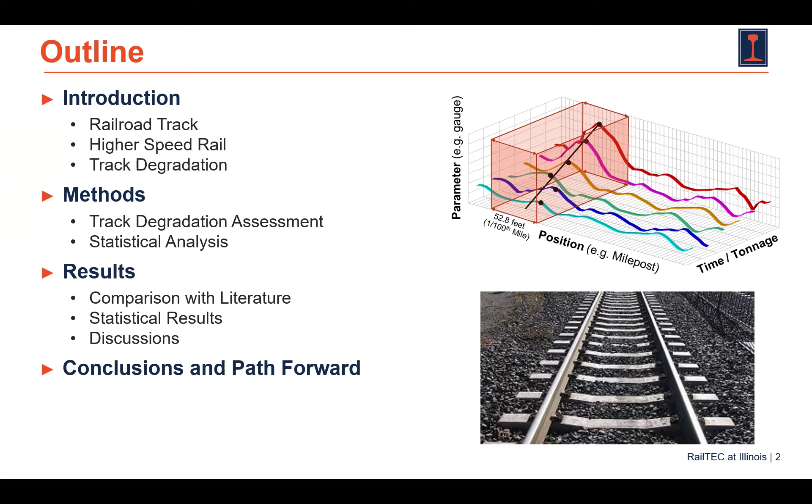Okay? So starting with a very high level about the railroad track. So railroad track is made of several different components, as we can see here in this right-hand side. Can you guys see my arrow here where I'm pointing at? Just to be sure. Okay. So we have the rails, we have the cross ties or ties or sleepers, depending on where you are, and we have the ballast. So the rail is these pieces. I believe everybody knows. We have the sleepers or ties, which are these elements, and we have the ballast, which is these rocks. And also we have the subgrade, which is the ground beneath all this structure.

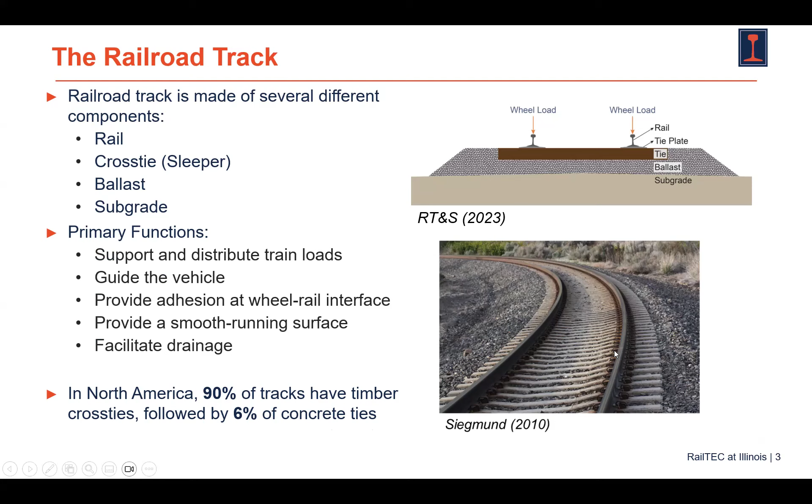So among the primary functions of the railroad track, it has to support and distribute train loads, to guide the vehicles, to provide adhesion at the wheel-rail interface, to provide a smooth running surface, and this one will be very important for us today, and also to facilitate drainage. Just a fact here, in North America, 90% of the tracks have timber cross ties, which is not this case, followed by 6% of concrete ties. Our study today will be done on a railroad that uses concrete ties, okay? So just keep in mind that it's the minority of the track length here in the US.

So about higher speed rail. So is it a typo? It should be high speed rail. No, it's higher speed rail, not high speed rail. So it is defined as intercity passenger rail services with speeds that are higher than conventional rail, but not high enough to classify as high speed rail by international standards, let's say. So we have a lot of definitions and speed ranges from country to country, but here we will define it as passenger rail service running at 80 to 150 miles per hour.

Usually, they have some degree of shared infrastructure with freight trains, especially in the US, where we have mostly track dedicated to freight. It's easier to make some modifications, some improvements on track, and then run these higher speed trains, than create a totally new dedicated track. It provides better passenger rail service and shorter travel times. But as I mentioned, we need some infrastructure upgrades. So we need wider curves to allow for these speeds. Also, the turnouts have to have higher diverging speed. And all the components, ties, fastening system, and ballast now have to consider both types of trains. Also, the signaling system will change.

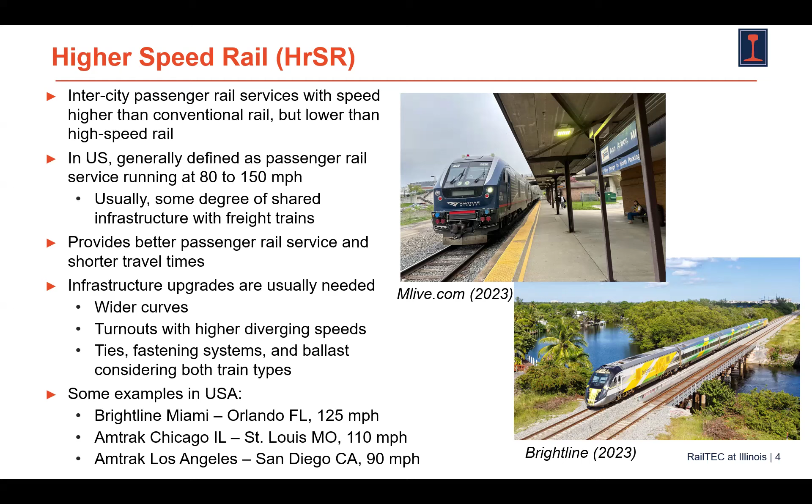Some examples in the USA: we have Brightline that goes from Miami to Orlando that runs up to 125 miles per hour, and Amtrak from Chicago to St. Louis and from Los Angeles to San Diego, which run at 110 and 90 miles per hour respectively.

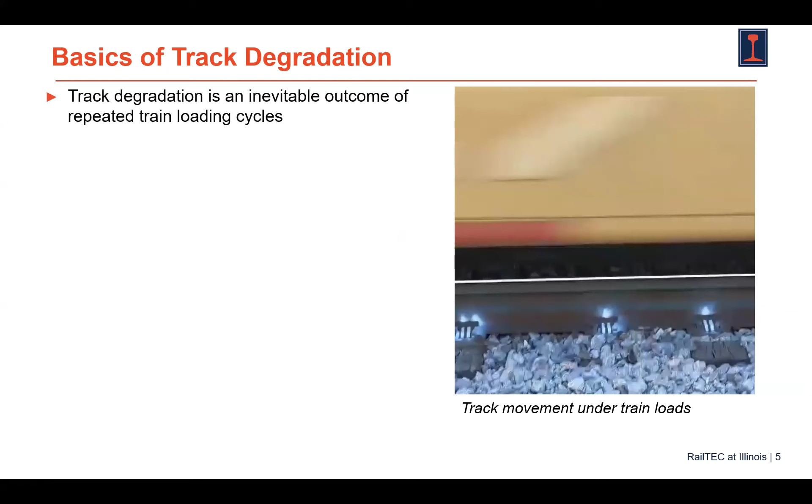So now talking about track degradation, which will be the main question in this presentation. So track degradation is an inevitable outcome of repeated train loading cycles. And here we have a video, and we can see very clearly this vertical movement that we have whenever we have a wheel passing. So this cyclical loading will lead to deterioration of the fastening components, the tie plates, the cross ties, and also the ballast, okay?

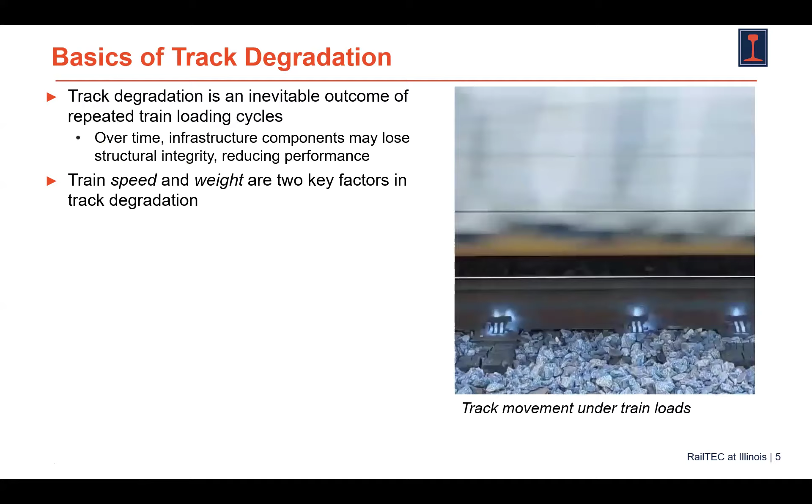So train speed and also train weight are two key factors when we talk about track degradation. When we talk about heavy freight trains, they impose high static and impact loads, contributing to ballast crushing and subgrade settlement. When we introduce higher speed passenger trains, they have higher dynamic forces, so a higher vibration rate or higher frequency, let's say, which can amplify this degradation if track conditions are suboptimal.

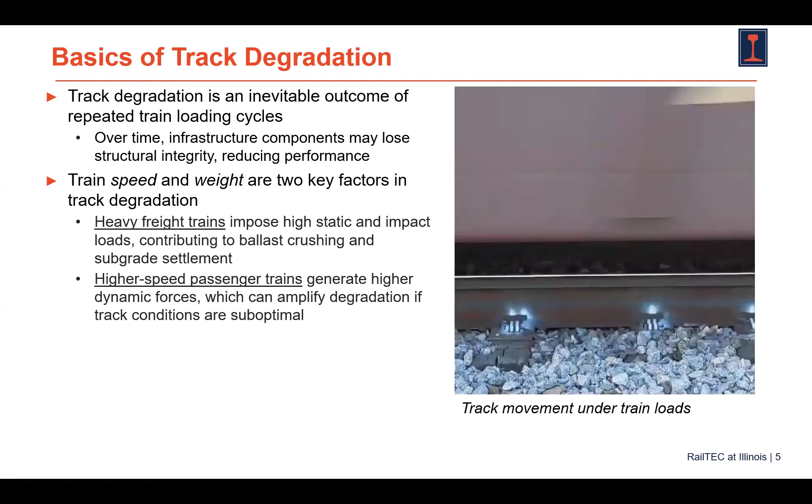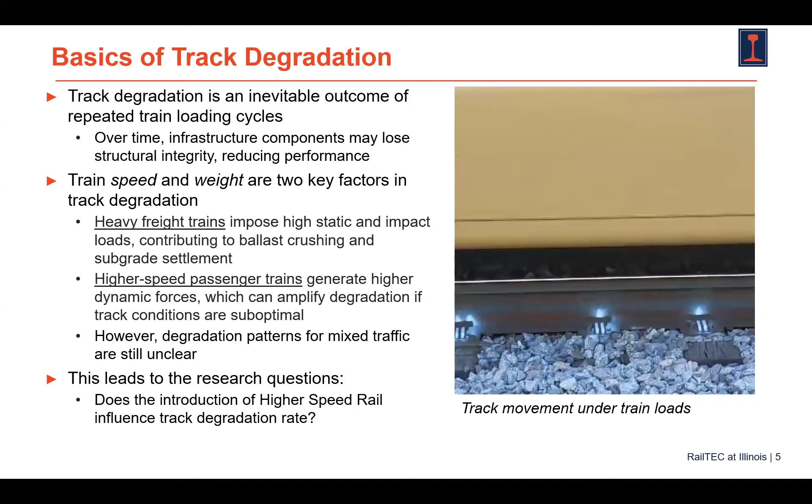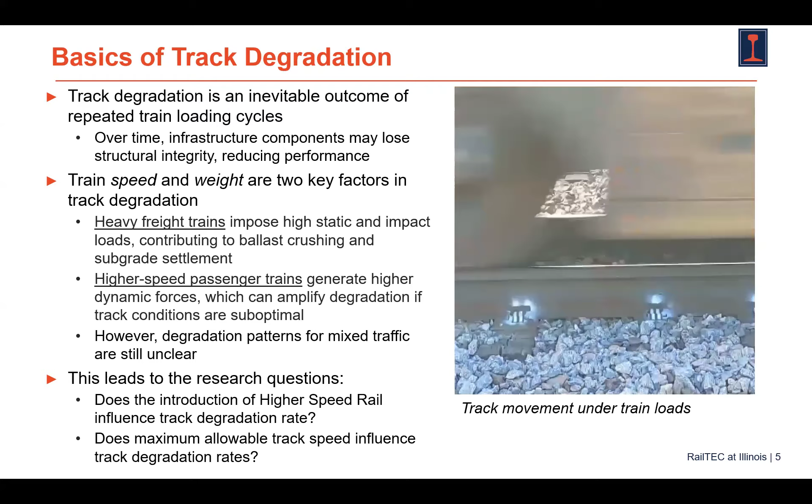So we have a lot of research trying to understand this, okay? But the degradation patterns from field data, real life data for mixed traffic are still unclear. Okay, so this leads to our two research questions. Does the introduction of higher speed rail on a track that before had only freight trains influence track degradation rate? Does this degradation rate change after the introduction of higher speed rail, and how did it change? And does maximum allowable track speed influence these degradations?

So for our field of study, we got data from 35 miles of Class 6 track located in North America. We cannot disclose exactly where the location is. It carries 30 million gross tons (MGT) per year, which is 15 MGT per track. We have two main tracks, except for a bridge section where it's single track. And something particular about this place is that the track segments vary in age.

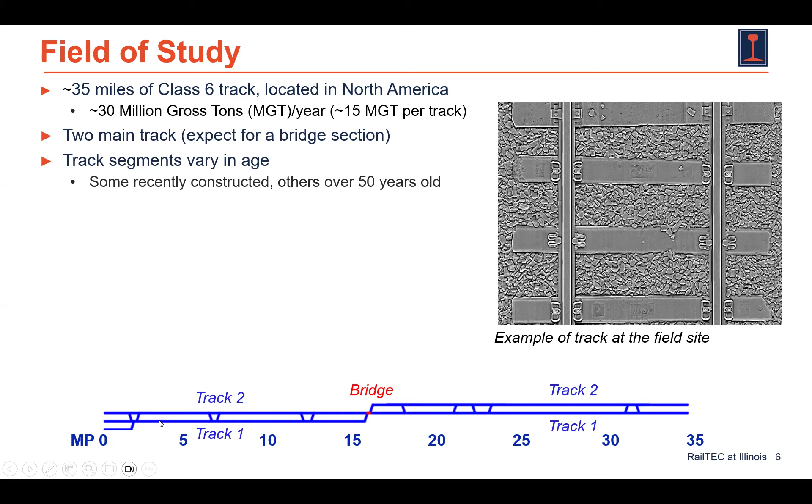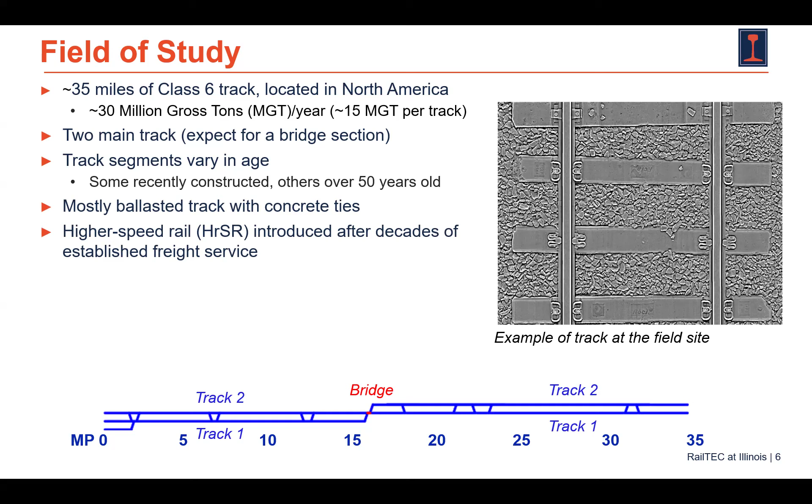So we have some brand new track that was constructed to receive this higher speed rail for this upgrade, let's say. In the past, it was only main track with some passing sidings and a few sections with double track. So we have this very recently constructed track and some places that have cross ties and fastenings of more than 50 years old, okay? It's mostly ballast track with concrete ties, as we can see in the right-hand picture, and higher speed rail was introduced after decades of established freight service.

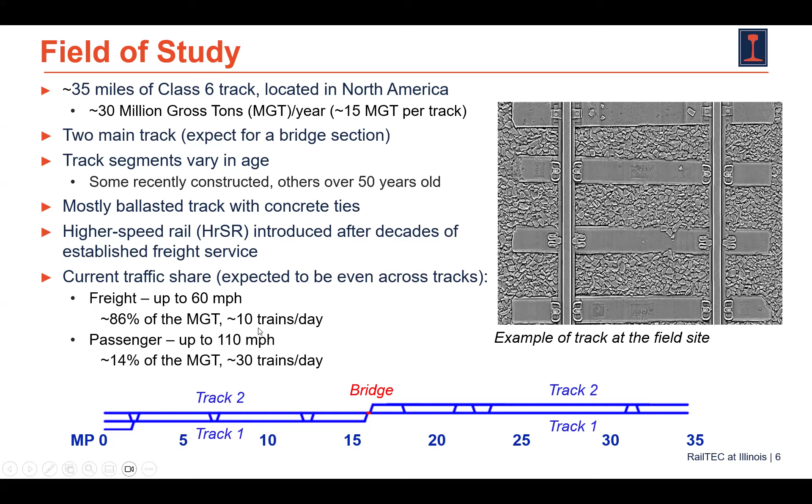Today, the current traffic share is 86% of the MGT being freight, up to 60 miles per hour with 10 trains a day, and 14% of the tonnage is from passenger trains, which run up to 110 miles per hour with 30 trains a day.

So the parameter that we used to measure track degradation was the rail profile. And what is rail profile? The definition is that it represents the vertical surface uniformity of each rail. And it's usually measured using the midpoint offset of a 62-foot chord. So we can imagine that rail profile is a measure of how wavy the track is.

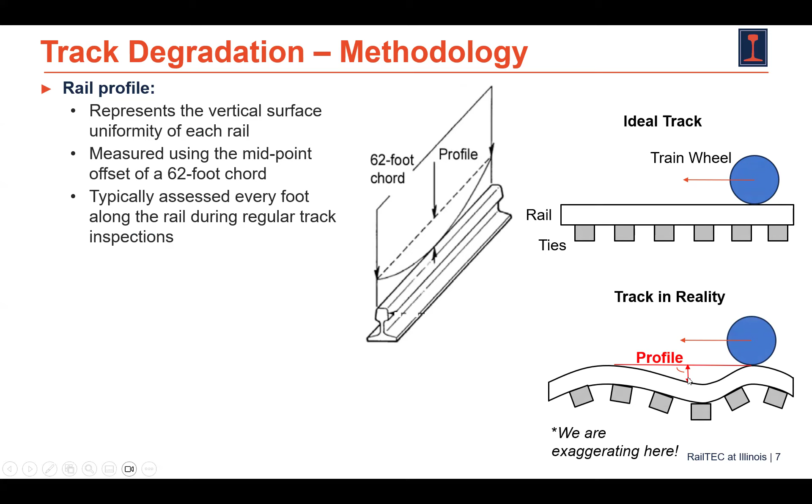Okay, we can see here in the ideal world we would have a totally horizontal track without any deformation. But in real life it's something like this, but we are exaggerating a lot. It's not a roller coaster, but this will be the measure of the profile. If we have a 62-foot chord here, we take this measurement and this is the profile. And usually on track inspections, they take this measurement for every foot, okay?

So according to the class of your track, you have some maximum thresholds for these values, okay? So if you are class 6, as is our case, you can have a maximum of 1 inch. With this, you can allow for these higher speed rails, high speed trains.

So we get these profile measurements, and for this research, we have 30 months of data and a lot of inspection runs. We define inspection window length as 1/10 of a mile. So we have this inspection window, and we applied the aggregation function, which in this case was the standard deviation.

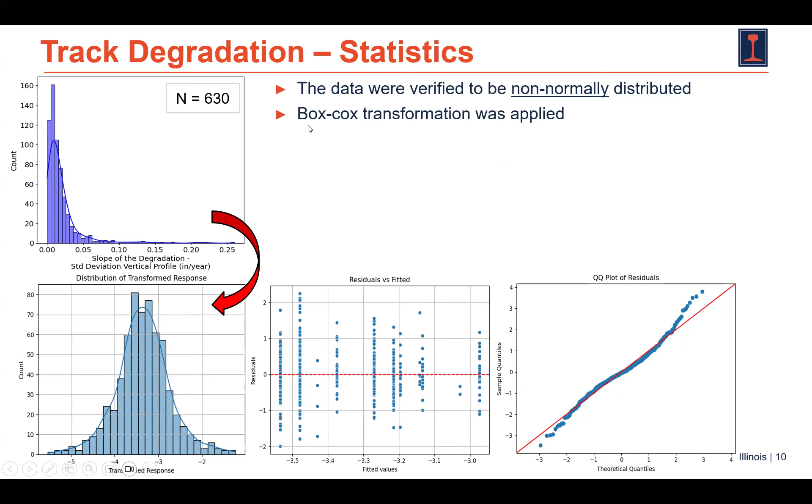So we applied statistics. Our data was verified to be non-normally distributed, so we used the Box-Cox transformation, as we can see here. And then we applied the ANOVA type 3 for unbalanced design because we have different sample sizes. And we considered 2 factors and 2 blocks. The first factor was maximum allowable speed with 3 levels, and this is for passenger: lower than 60, between 65 and 79, and from 90 to 110 miles per hour.

Factor 2 was the higher speed rail condition, pre or post this passenger train introduction. And we used as blocks the track numbers and the age, old and new. So these blocks are factors that might influence, but we are not so interested in them, so the model will take them into account. And also we evaluated the combinations between the main factors on a post test.

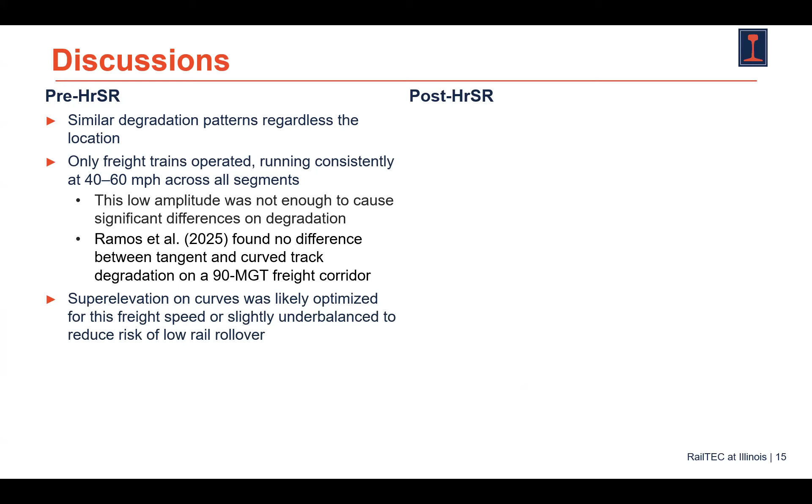So maybe this low amplitude was not enough to cause significant difference on degradation. Also, Ramos et al. found no difference between tangent and curved track degradation on that same 90 MGT freight corridor, which can support this finding. Also, when we think about the curves here, super elevation on curves was likely optimized to this freight speed, these traffic patterns of freight trains, and as it was optimized for this specific traffic type, we didn't have so much difference between curves and tangents, okay?

So, on the other hand, after the introduction of higher speed rail, the places with lower speed, that we believe are the places with more demanding geometry, let's say more challenging geometry, started to degrade faster. It is possible that now that we have mixed traffic, one of these train types, either passenger or freight, is applying unbalanced forces on the curves, especially when we think about the super elevations, and then it is leading to a faster degradation.

And how can we add this passenger train now, and now it's degrading at a slower rate than before? What we can state here is that maybe because now we have tighter FRA thresholds for profile, as we saw, maybe the maintenance quality is better now. So now they are carrying out maintenance that is meant to last more, so maybe this is overcoming these additional dynamic effects of the passenger trains. And we have some information that some undercuts were performed on the site recently instead of tamping. So this can help support this hypothesis.

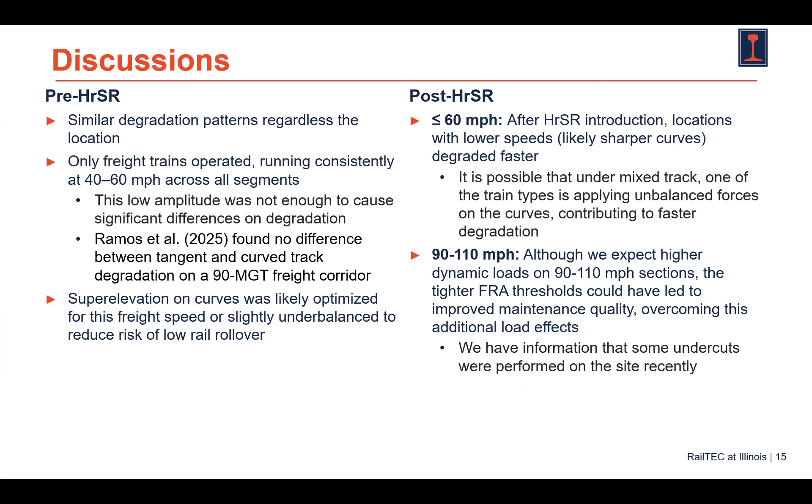So some brief conclusions and path forward. From the ANOVA test, maximum allowable speed was the only main factor influencing track degradation. However, we saw with our post tests that speed influence is different before and after higher speed rail introduction. Locations with more challenging geometry degrade faster now than locations that allow for higher speeds. And we hypothesize that maintenance actions now are more effective than they were before, okay?

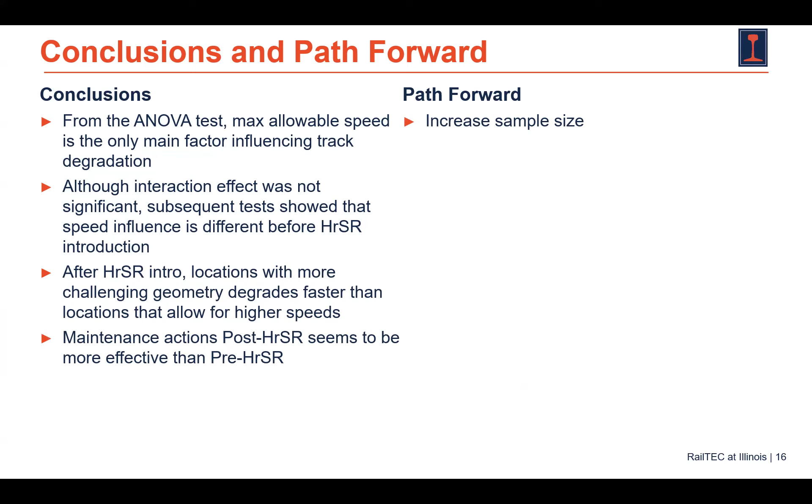As path forward, we want to increase our sample size to have more powerful statistics. We can update the analysis for 1/20 of a mile instead of 1/10 of a mile post. We can also get more data for the current condition. We can investigate the influence of curvature instead of maximum allowable speed as a proxy. Also, we want to investigate the influence of environmental parameters, for example, accumulated rainfall.

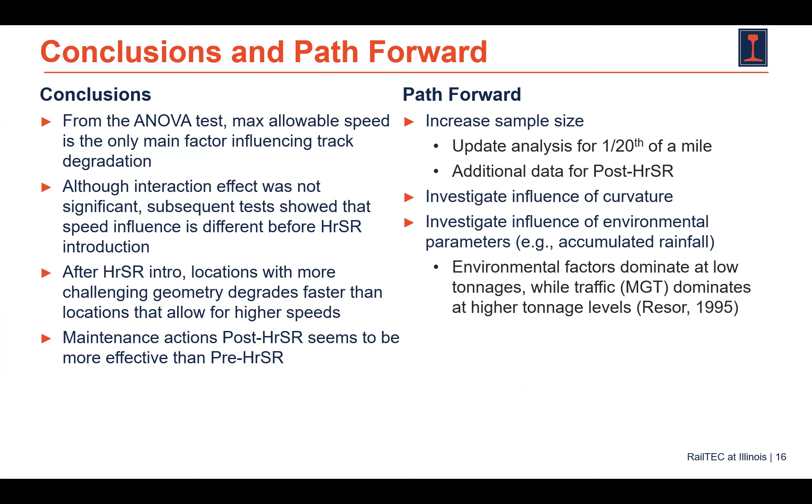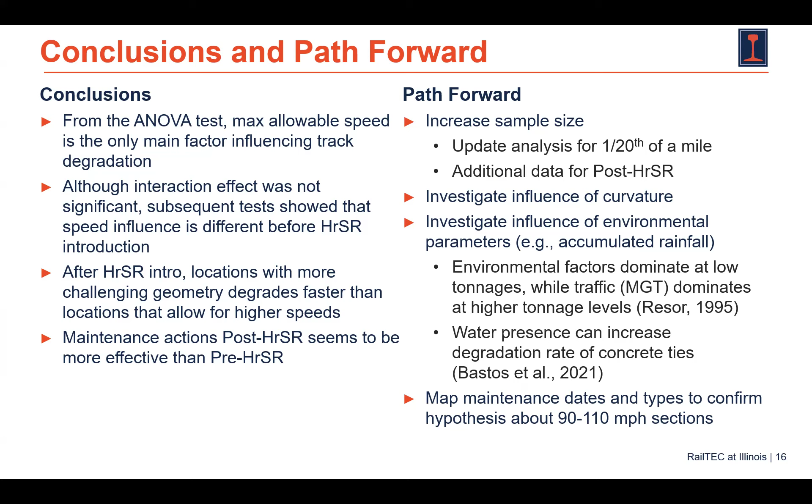We know that environmental factors dominate the degradation rate at low tonnage, while MGT dominates at higher tonnage levels. And also we know that water presence can increase the degradation rate of concrete ties. So maybe we had a lot more rain before, and that's why we have this difference on the higher speed sections. Also, we want to map the maintenance dates and types to confirm this hypothesis about the 90 to 110 miles per hour sections.

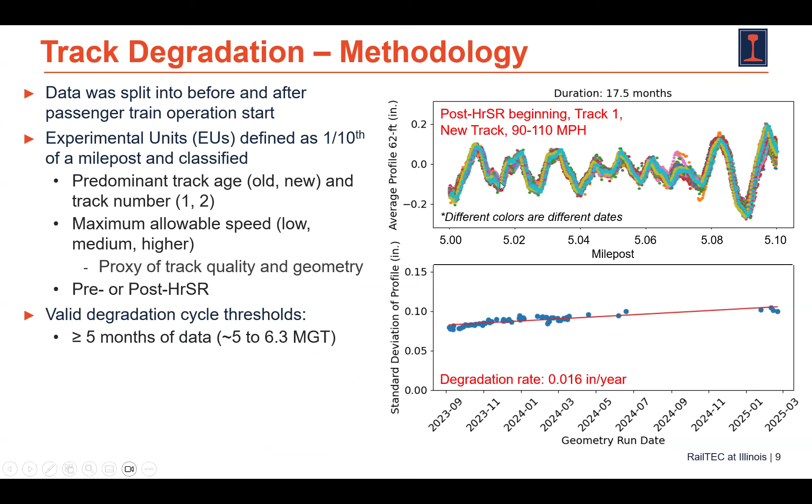Yeah, exactly. So I can share my screen again. As we can see here for our real data, maybe here will be better. When we get this measurement, usually they get it with lasers, so they will measure this, and then go 31 feet for each of the sides, and measure the height. Okay, so for our measurements we have something very wavy.

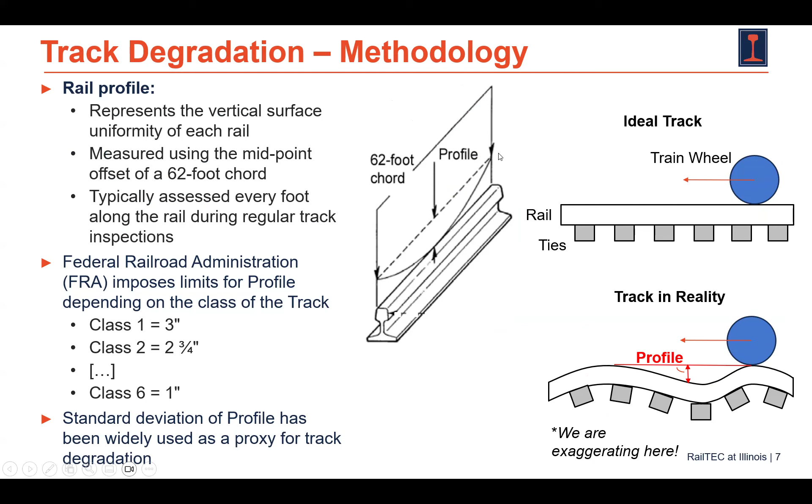Okay, so it's based on a standard. Let me go down. It's based on an imaginary horizontal plane. It's usually aggregated over the zero, okay? And we have positive values and we have negative values. So we can think of this standard deviation of profile as an absolute mean of these guys. You know what I mean? Usually they will be around this zero value. Okay.

I don't know if it was clear. Thank you for explaining. Okay, did it answer? Yes. And yes, thank you.

Here we are getting this for 1/10 of a mile, and then we have this value. We'll have this representative value, and then we have for the next one. We get for 1/10 of a mile because it's hard to map this exactly same position for all the different dates. It's a challenge. So we have some error. So it's good to use this. We have to use this aggregation function.

But the main point I think is that it's very around the zero. So it will be kind of an absolute mean. And the signal pattern will be very similar for all the dates, but the amplitudes will be changing. That's why the standard deviation is increasing. I see.

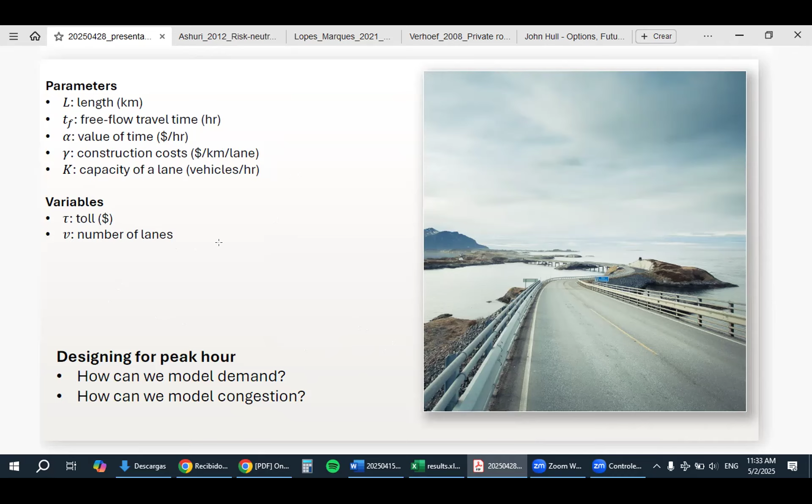So the total travel time is not going to be the free flow travel time. We're going to have to add some additional time for a congested road. So let's look at the demand first. We're going to just assume a linear demand. So it's going to be determined by these two parameters, delta 0 and delta 1.

And now the question would be, how do we optimize the two variables that we have? So the toll and the number of lanes that we want to build. And the answer for that is going to depend on who's making the decision. So let's look at some different points of view, and then we're going to see how we handle that.

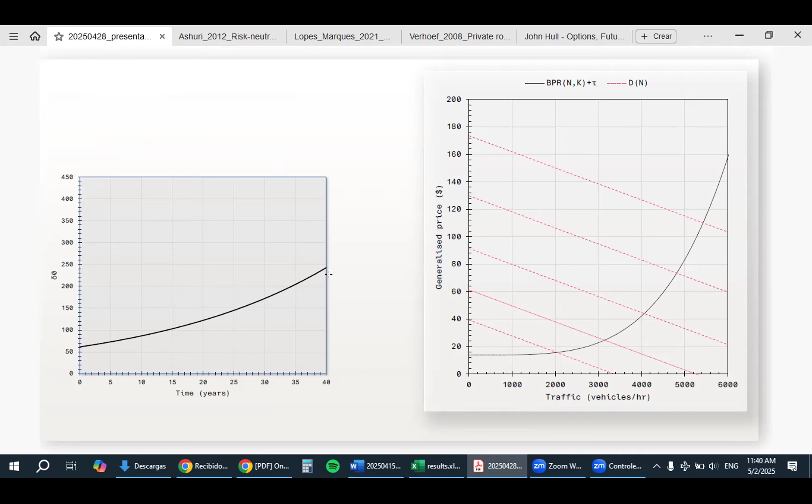And if you remember, the intersection with the y-axis is determined by this parameter delta zero. So we're going to plot how the delta zero, the reservation price, evolves over time. So here we have time on the x-axis and delta zero on the y-axis, and for a 40-year contract duration, we're looking at how delta zero changes over time. It would be reasonable to expect for it to be something like this, where population increases or demand increases and delta zero grows over time.

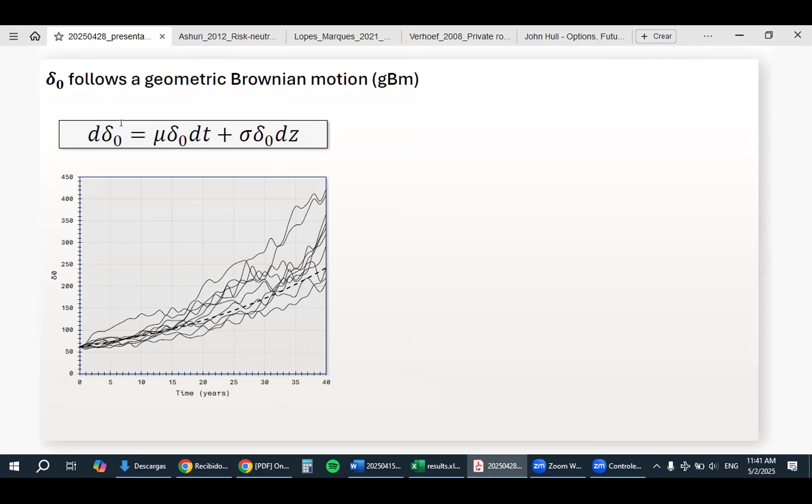But it's probably not going to look like that. It's going to look something more like this, where sometimes it goes up and sometimes it goes down. And if we do this for many contracts, we could have something like this. So we are always starting with the same delta zero. We're assuming demand, for example, is right here. And then the path that it could take could be something like this or like that or any other path within this. So to model that, we're going to be using a geometric Brownian motion, which is described by this differential equation right here.

So this has two components, which are a deterministic part and then a stochastic part. So the deterministic part of this equation that we're going to use to model the evolution of the demand is given by this drift parameter. And then the stochastic part is given by this volatility right here, multiplied by delta zero, multiplied by this right here, which is distributed normally. So the growth rate of the price is going to be distributed normally, which means that the price itself is going to follow a log normal distribution.

And I want to point out right here that this is the same way that many people model the evolution of stock prices. So this is the parallel with the financial market that I mentioned at the beginning. The evolution of stock prices can be modeled through a geometric Brownian motion.

And so the valuation of future contracts that you can write on a stock price can be done in a similar way to what we're going to be doing here for our infrastructure contracts, assuming the demand behaves in the same way or a similar way to what a stock would have, with some volatility and a drift parameter that gives us the expected growth.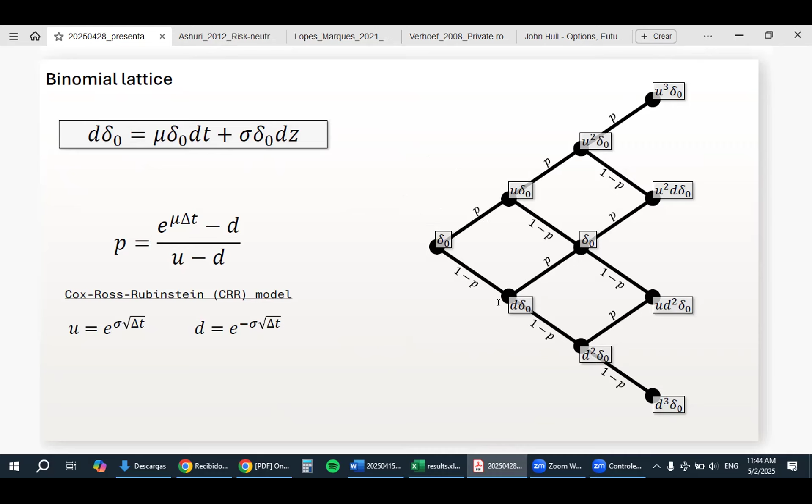And then we also have these two factors right here, U and D, which give us the factor by which we multiply the previous price. So for example, if we have delta zero right here, the next step, if we go up, we would have U by delta zero. And if we go down, we have D by delta zero, and so on and so forth.

So you can see that if we increase the number of time steps a lot, we would tend towards the continuous process. But this discrete process is going to allow us to do some calculations on these contracts. So now with that lattice in mind, we have some functions that we're going to have to evaluate at every node on the lattice, depending on who is in charge of making the decision. So it can be either the private company or it can be the government.

Each one of these agents is going to have their own objectives, and therefore they're going to have their own things that they're trying to optimize for every time step. The private firm is going to try to optimize the revenue, which is given by N multiplied by tau. And the government is going to try to maximize the overall welfare of the project.

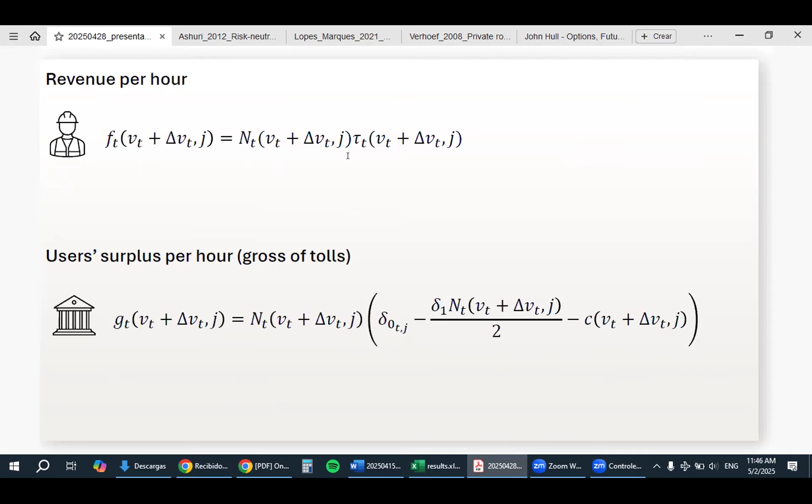So for each of these nodes in the lattice, we're going to be evaluating these functions. If you notice, we need to determine the number of users that we have at each of these points. So we're going to be doing that by solving this equilibrium that we presented at the beginning for the static model. So we're going to assume that at each node, the demand is static. So we can solve this equilibrium.

Or if we have flexible tolls, so we don't know exactly what the toll is, then we're going to have to solve an optimization problem constrained by this equilibrium, depending on who's in charge of making the decisions, whether it's the private firm or the government.

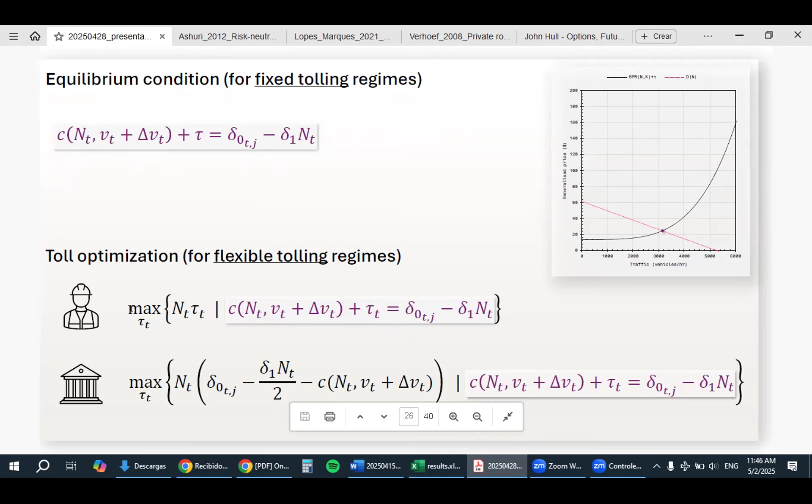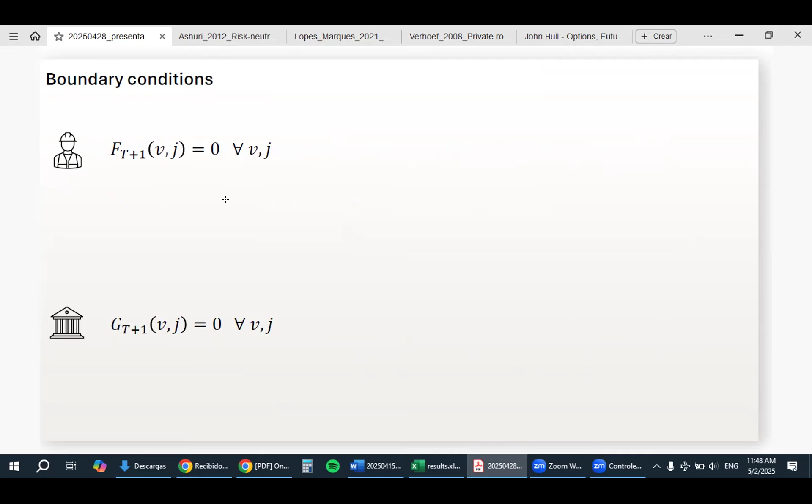Before that, we need some boundary conditions. So we're going to assume at the end of the contract, there's no additional revenues or any additional welfare. And then these are the answers. So we go all the way back to the first initial node, and we can calculate the profit for the private company or the welfare in the case of the government.

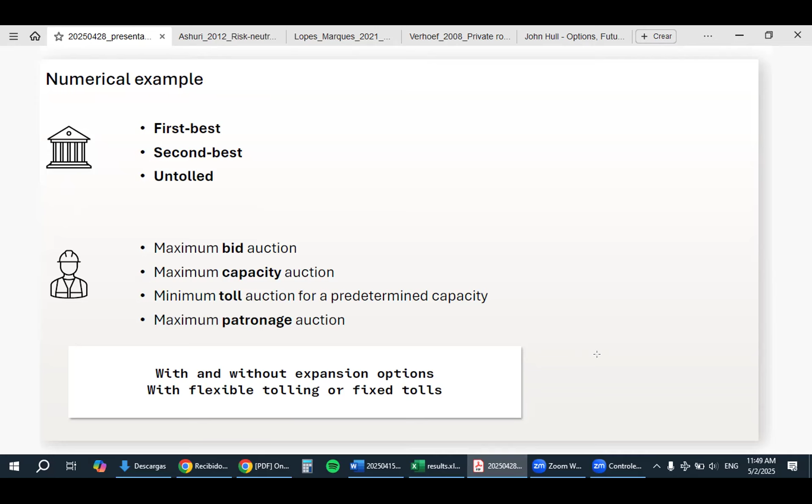We're considering the option to expand the road. Or they could also have the option to vary the tolls. So at any point in time, they could decide to increase or decrease the tolls according to what the demand looks like, depending on what type of contract they have. So if the contract that they have with the government is more rigid, then maybe they are not allowed to build additional capacity, or they're not allowed to change the tolls at any point. Or if they have a more flexible contract, they may have those options, and that may affect the revenue for the private firm, but also the overall welfare, which is what the government, in theory, would care about.

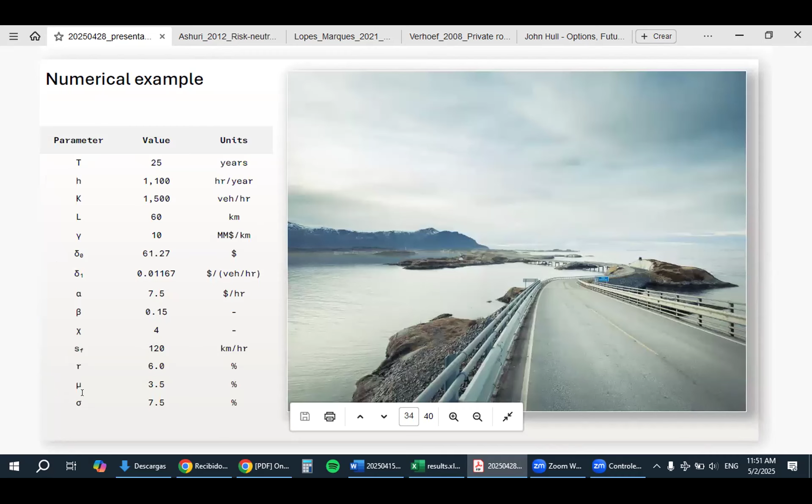So this is telling us that depending on how much volatility you have for your demand, the type of auction that you may choose can change, right? So the one that's going to be the most efficient may not be the same as if you had a lower volatility, because the higher the uncertainty in that demand is, the more value these options are going to have. So a private firm may be able to adapt easier to a changing demand if they have the option to expand capacity at any point during the contract, or to change the tolls that they're charging at any point in the contract.